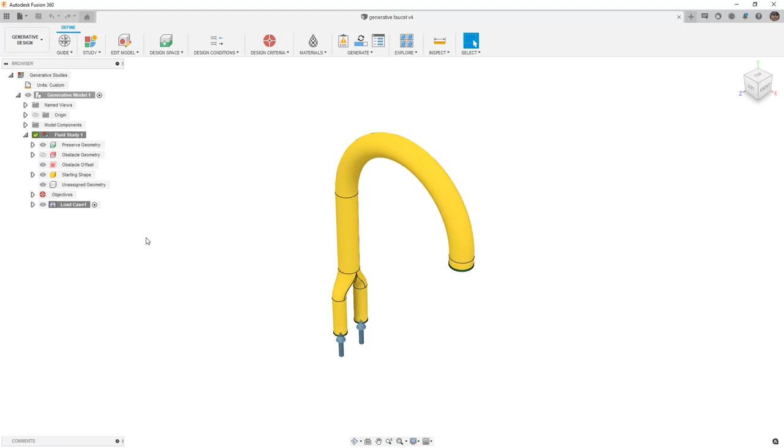In Fusion 360, we want to carry on with our generative faucet design. This has a generative study that's already run and solved, so I'm going to head into Explore. With generative fluid, we were only going to see one version of an outcome, and this is because we don't have multiple materials or multiple manufacturing methods.

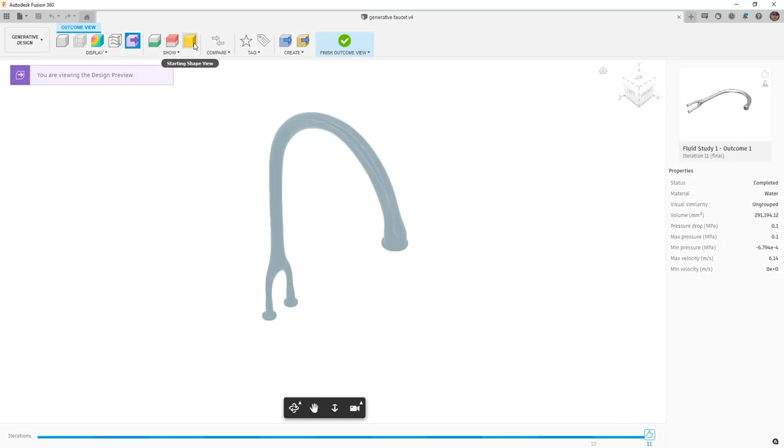So let's take a look at the one outcome we have and explore the variations that were created based on our original design. When we take a look at some of the options we have, we can show our starting shape. And if we view this from the left, we can see that our starting shape is having the generative build inside of that volume.

So if we want to explore more areas or give it more flexibility, we can always increase the size of that starting shape or maybe even exclude it completely. Unlike a structural generative design, fluid flow really benefits from having that starting shape as there is a lot of room for it to try to explore. So whenever you can, make sure that you do include that starting shape for a generative fluid.

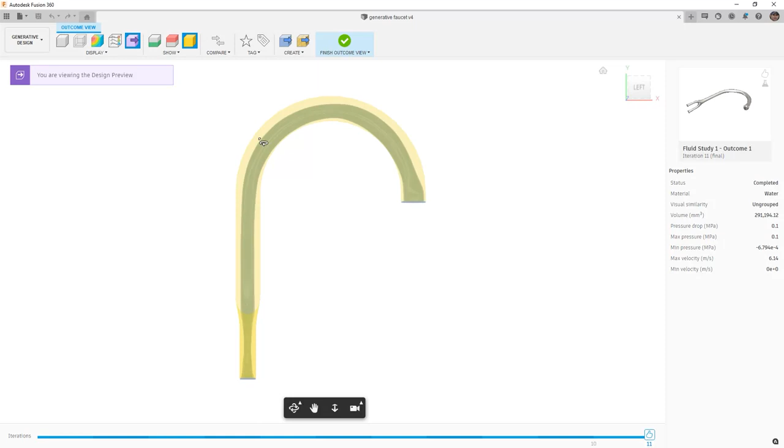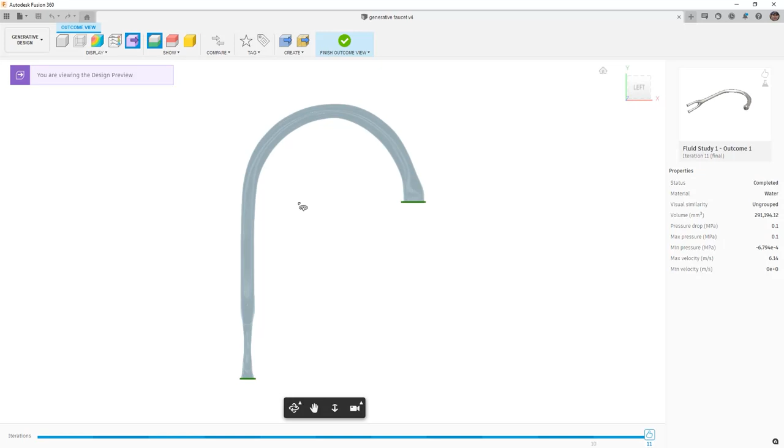Also note that we did have some areas where we needed to constrain the build. We wanted to make sure that we avoided this large cylinder and we used the starting shape to ensure that we were going up and around. We also had some constraints for going through the mounting plate on a sink and for the start and the end. If we take a look at our preserved geometry, we basically had the inlets and the outlets, and those were to define the fluid inlets and the pressure outlet.

When we take a look at our display options, we can see a pressure view, which shows the area of high pressure, and then of course we're going to 0 psi or no pressure at the outlet. That's how we defined the study. We can also take a look at the flow lines. The flow lines give us a good indication of the magnitude of velocity.

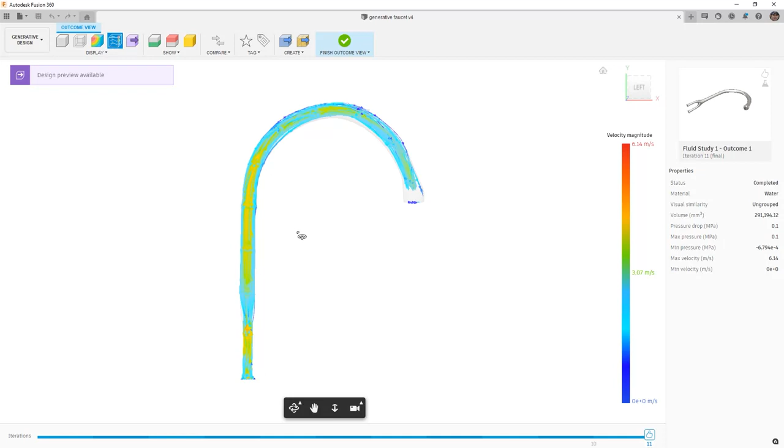Now, if we rotate this design around, we can see that we have the highest velocity just before the two inlets merge. Let's go ahead and rotate this around to a front view, and we'll pan up slightly. We can see here that the fluid flow increases in velocity right around this area, and then it tapers back into the area where it's going to merge.

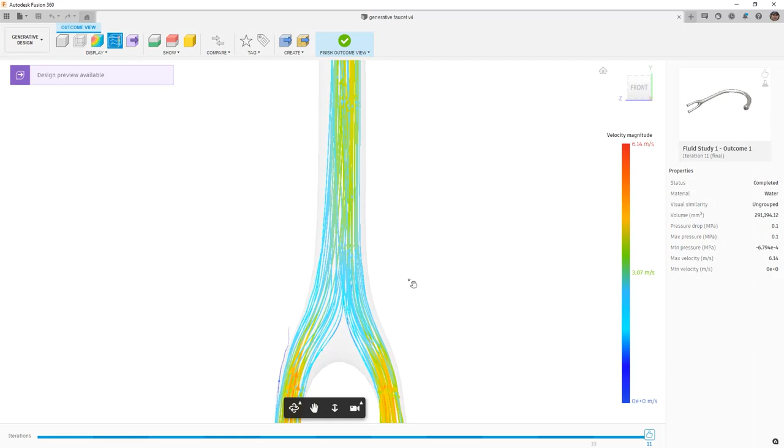One thing that you'll note if we take a look at the original starting shape, the size of the tubing that is used for this outcome is much smaller than we originally had. So this tells us instead of using potentially a 3/4 inch pipe, we could use a 1/2 inch pipe. If we move our way up, again, you can see that the volume is much less.

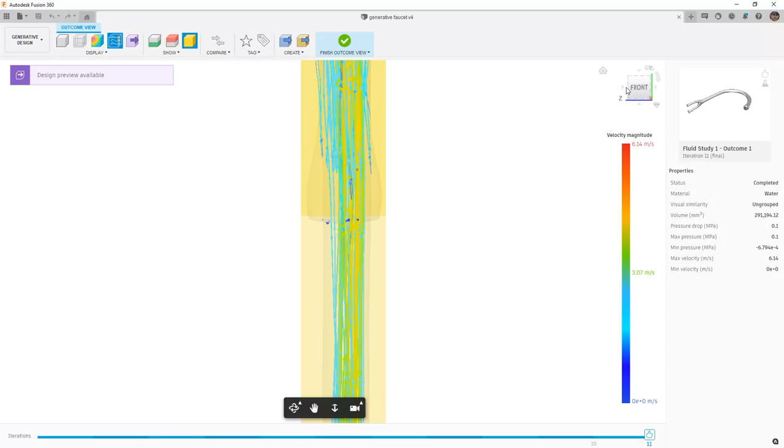And if we rotate around to a left or a right view, one of the other things we'll note is that in the exit of this, you can see that we're flaring out just slightly. One of the reasons that we are flaring out here and the fact that the flow traces don't connect to our preserved geometry is because we selected an incorrect face when setting up our outlet pressure.

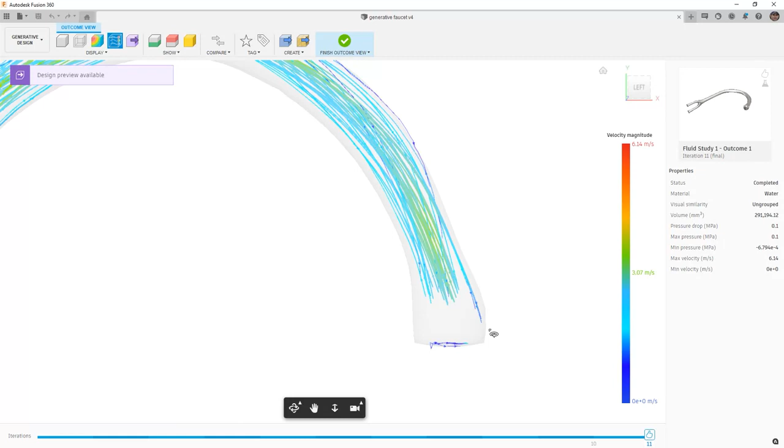So this is a case where we would really want to make sure we select that outside face of our preserved geometry to define that outlet pressure. So we're keeping the size of the tubing relatively small, and then we flare out just at the end.

If we want to turn this design into a 3D model, we have two options. We can do this from the design outcome, or we can do this from a mesh. Either option will be fine. It really depends on what your goal is downstream. If you plan on working with this design as a T-spline body, then we want to use the design from outcome. If you're going to simply create a 3D print or you want to use mesh manipulation, you can turn it into a 3D mesh.

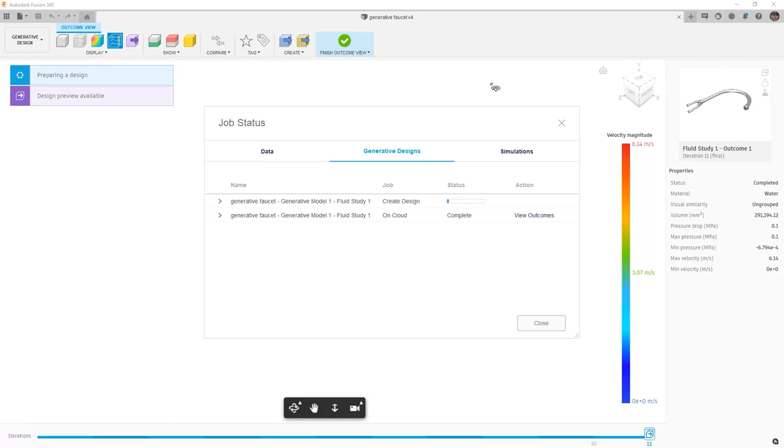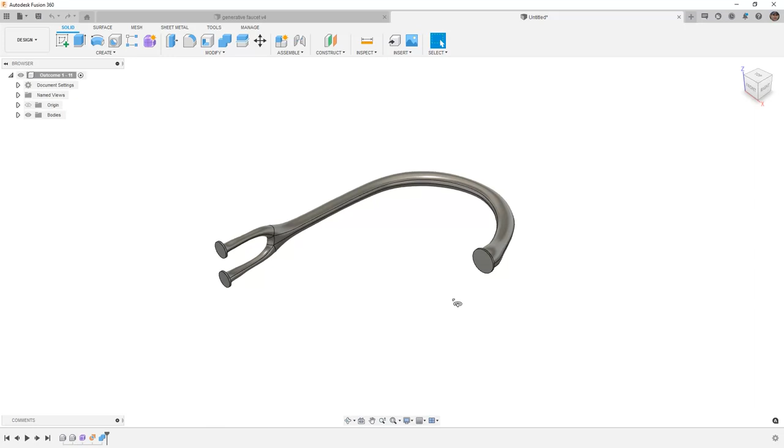Once we start this process, we need to wait for the outcome to be generated and then we can review it in Fusion 360. Now that a design is ready, we can simply click here to continue and open the design in Fusion 360. Now that we have the design open, there are a few things that we need to take a look at. We need to first identify what we have gotten from our generative study.

When we take a look at the timeline, we have our preserves, we have our obstacles, we have a T-spline organic feature, we have a boundary fill that turns it into a solid body, and then we have this combine, which goes through and removes any obstacle overlaps.

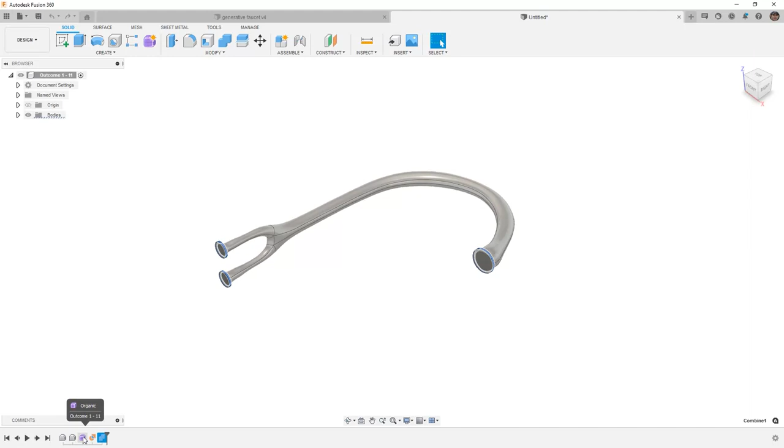If we want to make adjustments to the T-spline body, we can do that by coming back into this organic feature and making edits. You can see here that we've got a pretty nice result in terms of the mesh density, and if we want to make any adjustments, for example, if we want to slim or smooth any areas out, we can always go in, make selections, and use tools such as Smooth. And we can use the smooth slider to try to smooth out these areas if needed, or we can use things like cylindrify to try to turn them more into a standard type cylinder.

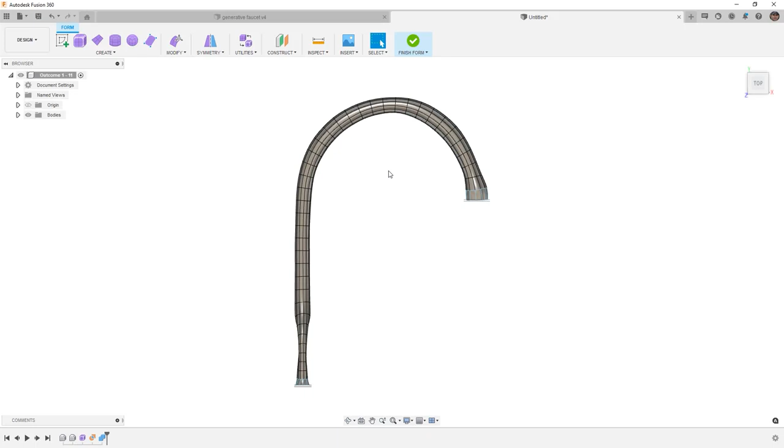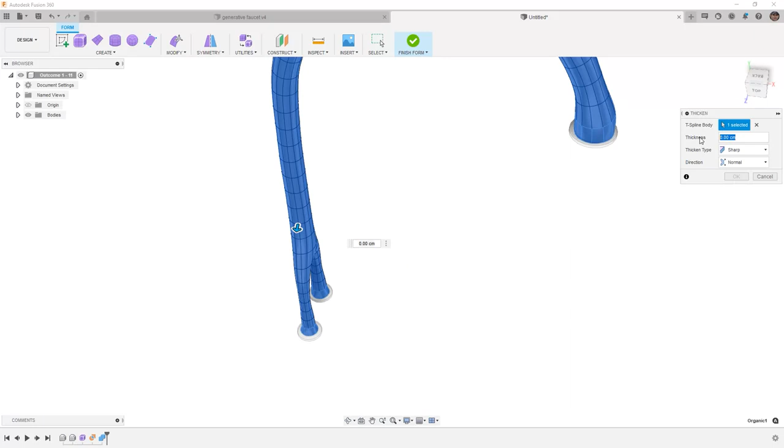For this example, we're not going to make any changes to that, but we should make sure that we understand that what we're getting out of generative design is going to be a surface of the internal fluid volume. So if we want to turn this into a solid body that has that extra thickness, we can use tools like modify and thicken, select our T-spline, and then we can move it out, in this case, 0.125 inches. This is going to allow us to thicken that surface normal to the current selection, and we're going to allow it to unfreeze those edges.

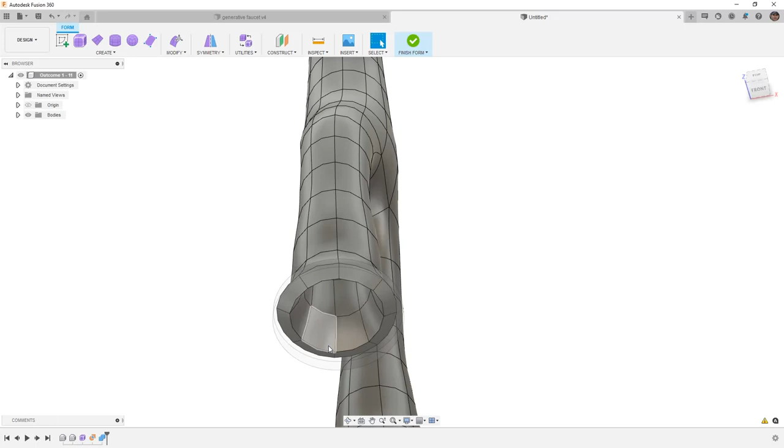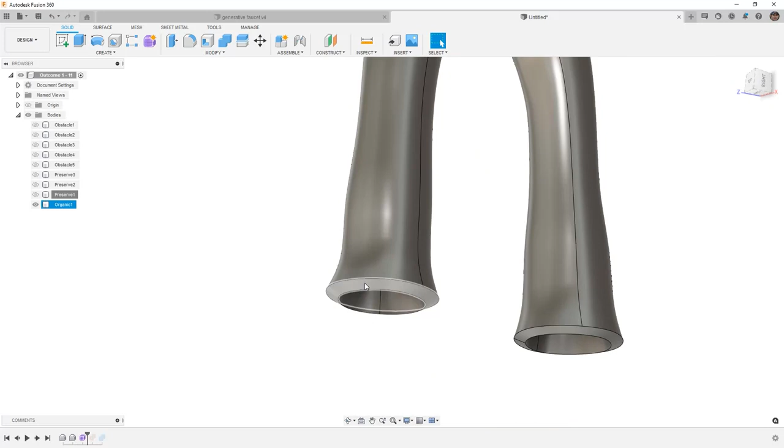When we unfreeze those edges, we might potentially have a problem when we go into boundary fill. So if we take a look at what we have, you can see that we've automatically created a solid body here. So if we finish this freeform, we take a look at the results and we scroll back before that boundary fill, let's go ahead and hide all of the bodies with the exception of organic. We'll select all, right click, and show hide. Now you can see here that we actually have a solid body and we can carry on creating the interface between this and other piping in the design.

Now we've taken that generative design and we've used it to create the internal volume, and that internal volume exactly mimics the minimum pressure drop that we need in our system. What we want to do from here is make sure that we save it. And if you did not solve your own study, you can go ahead and upload the supplied design generative outcome.f3d.

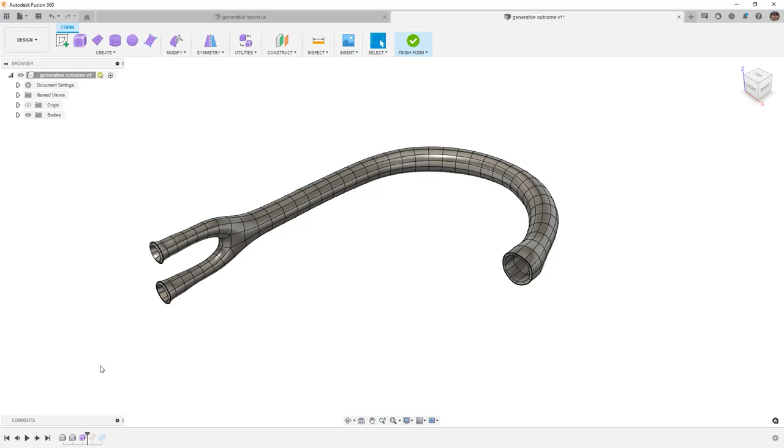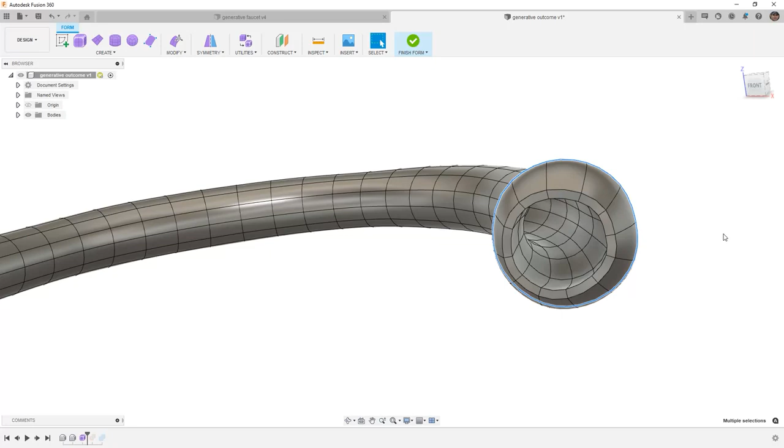If you wish to manipulate the generative outcome.f3d design, you can go ahead and modify the organic feature and make adjustments, but do note that with the addition of that thicken, when you use the T-spline tools, you will actually have individual control over the inside and the outside faces. For example, if we took this outside edge by double clicking, used modify, and we scaled it out, that's only going to scale the outside and it's not going to modify the internal fluid volume. So this will allow you to make adjustments and edits to the shape, and that will allow you to keep that internal fluid path the same.

At this point, I'm going to go ahead and save this design and move on, but you can carry on making manipulations and changes to the design as you wish.